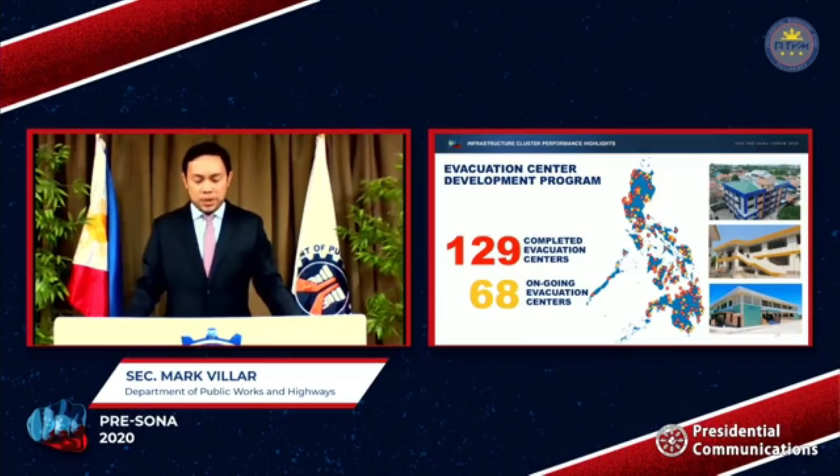Primarily built as a measure for disaster risk reduction, the Evacuation Center Development Program proved helpful during the Taal Volcano eruption in January 2020, and more recently for the COVID-19 outbreak. 63 evacuation centers were utilized as health quarantine facilities, capable of providing health monitoring and treatment to about 2,292 individuals. As of June 2020, a total of 1,686 persons were accommodated in these facilities.

The Center and Residential Care Facilities Infrastructure Project of the Department of Social Welfare and Development aims to give exemplary care and welfare services to marginalized and disadvantaged individuals, groups and families, including abandoned and neglected children, children in conflict with the law, street children, children with special needs, abused and trafficked girls and women, abandoned and unattached older persons, persons with disabilities, and deportees.

In 2018, 1.4 billion pesos was allotted for 210 projects in 71 dilapidated and congested facilities and 4 new centers. As of June 2020, 87% of 182 projects are already completed. An additional 114 million pesos was allotted in 2020 for 32 projects.

Maintaining peace and security, both from inside and outside forces, has been crucial for the country over the years. Through the Tatag ng Imprastraktura para sa Kapayapaan at Seguridad, or TIKAS, the construction of various infrastructure projects that will help the facility readiness of the military and police forces is given priority to ensure an environment of peace and security towards national development.

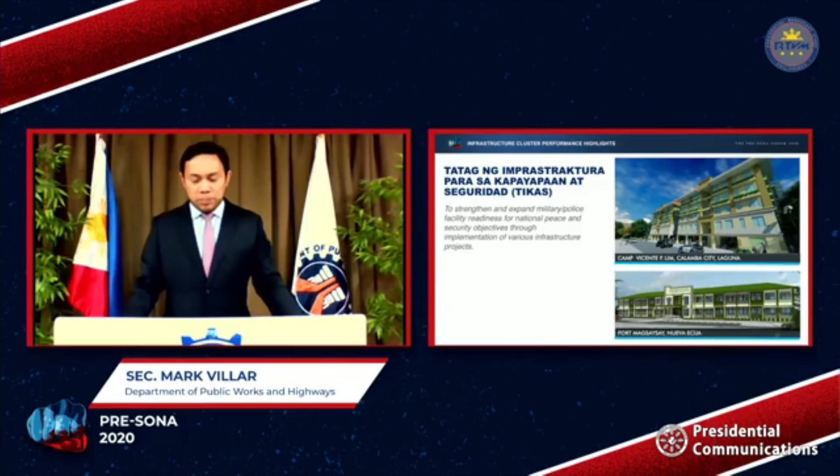From 2019 to 2020, a total of 7.1 billion pesos has been allocated for 297 TIKAS projects, one of which is the construction of a 5-story multi-purpose building in Camp Aguinaldo, which is near completion.

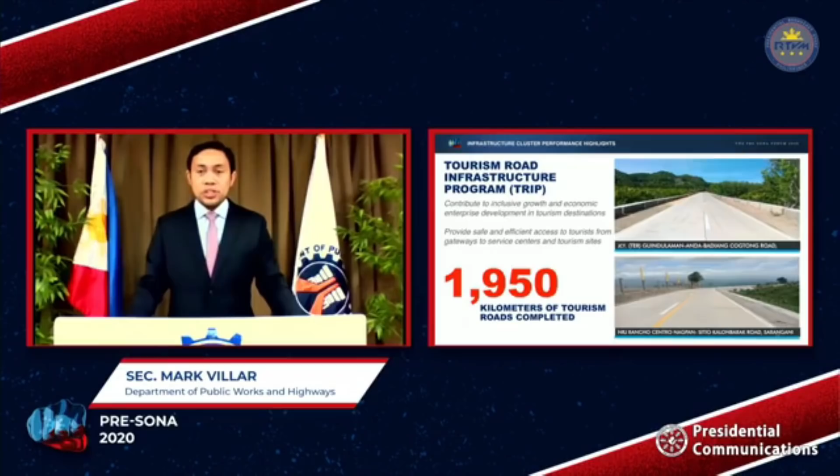The Tourism Road Infrastructure Program, or TRIP, is a highly successful and long-running convergence program of the Department of Tourism and the Department of Public Works and Highways that realizes tourism infrastructure development mandated by the Tourism Act of 2009. To date, a total of 104.5 billion pesos has been allocated for projects from 2016 to 2020, developing about 3,667 kilometers of access roads. These projects aim to enhance connectivity from gateways to service centers and tourism sites.

As of May 2020, 1,950 kilometers of tourism roads have been completed. The role of infrastructure is vital in sustaining tourism development.

In our Boracay Rehabilitation Program, for instance, the government is currently providing a safe and efficient road network throughout the island. Support infrastructure like pedestrian infrastructure, such as bike lanes, drainage, and enhancements such as lampposts and landscaping, are being rolled out towards a more rewarding experience for both locals and tourists.

The government remains committed to promoting inclusive growth and sustainable tourism by providing road access to community-based tourism sites. The ongoing improvement of the access road leading to Kaparkan Falls in Tineg, Abra will further boost the promotion of the falls as a new community-based tourism site in the Cordilleras. This effort will eventually spur economic activities, increase investments, and provide livelihood to the community.

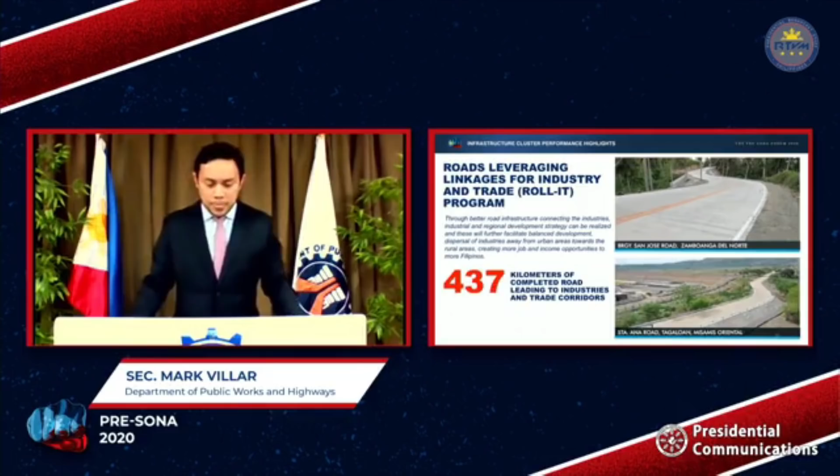The Department of Trade and Industry has also partnered with the DPWH to implement the Roll It program, which aims to enhance road connectivity and links industry and trade development in priority economic and manufacturing zones in the country. From 2018 to 2020, a total of 28.9 billion pesos has been appropriated for the construction and upgrading of about 1,009 kilometers of access roads leading to industries and trade corridors across the country.

As of May 2020, 437 kilometers have already been completed. Presently being improved is the access road leading to Nasipit Agusan del Norte Industrial Estate Special Economic Zone in Agusan del Norte. This road will connect Misamis Oriental to Agusan del Norte. The completion of the Barbero and Service Road in Tagoloan, Misamis Oriental has improved the connectivity of PHIVIDEC Industrial Estate to the port area, thus improving the logistic network of Northern Mindanao.

Amid the impending threat in conflict-affected areas, the government will bring about lasting and inclusive development to every Filipino from all sides of the country. The 19-kilometer Marawi Trans-Central Road project under the JICA grant has made remarkable progress since work resumed, towards achieving the early completion goal by December 2020.

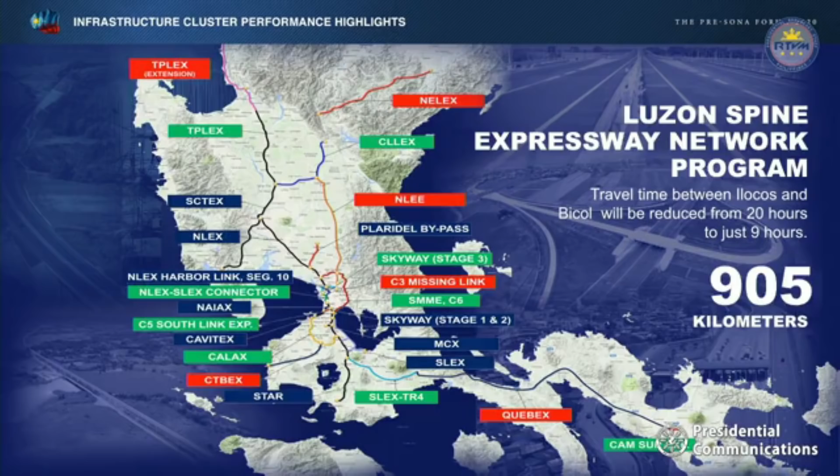This July 15, 2020, the 89-kilometer Tarlac-Pangasinan-La Union Expressway, or TPLEX, will now be fully utilized from Tarlac City to Rosario, La Union. Travel time between Tarlac City and Rosario, La Union will be reduced, and travel time from Manila to Rosario, La Union will be reduced to just 2.5 hours, benefiting 20,000 travelers per day.

Also, to further promote the development of Northern Luzon, a proposal has been submitted extending TPLEX by an additional 59 kilometers up to San Juan, La Union.

The east and west lateral connectivity is also being improved through the construction of the Central Luzon Link Expressway. The 30-kilometer expressway will reduce travel time between Tarlac City and Cabanatuan City from 70 minutes to 20 minutes, benefiting 11,200 motorists per day. The project is already 85% complete, and a significant portion of this expressway will be open before the end of the year.

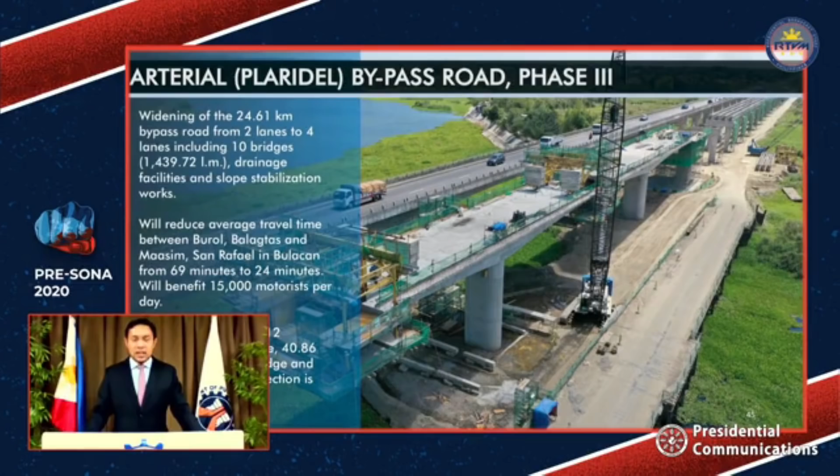The 24.61-kilometer arterial Plaridel Bypass Road, which was fully completed last May of 2018, is currently being widened to further ensure the safety and convenience of the motorists. The construction of the 1.12-kilometer Angat Bridge and the

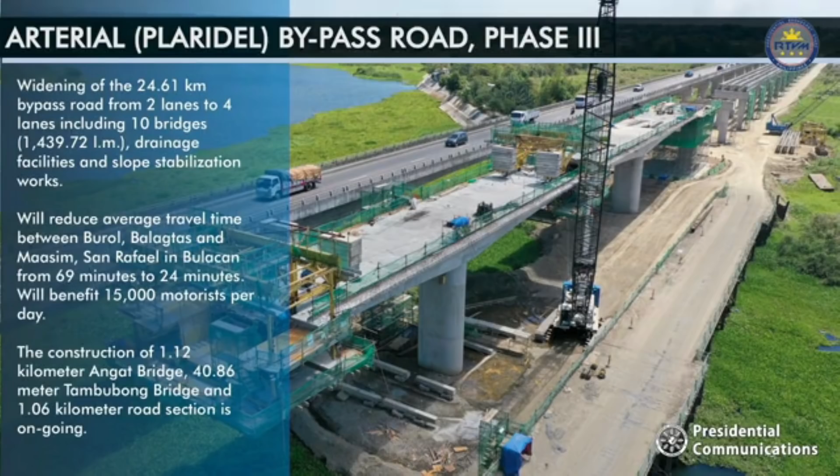40.86-meter Tambubong Bridge and 1.06-kilometer road is currently ongoing. The South Metro Manila Expressway, or C6, will reduce travel time from Bicutan to Batasan from 1 hour and 50 minutes to 26 minutes. Advanced construction activities for the workable area along Skyway FTI section is ongoing.

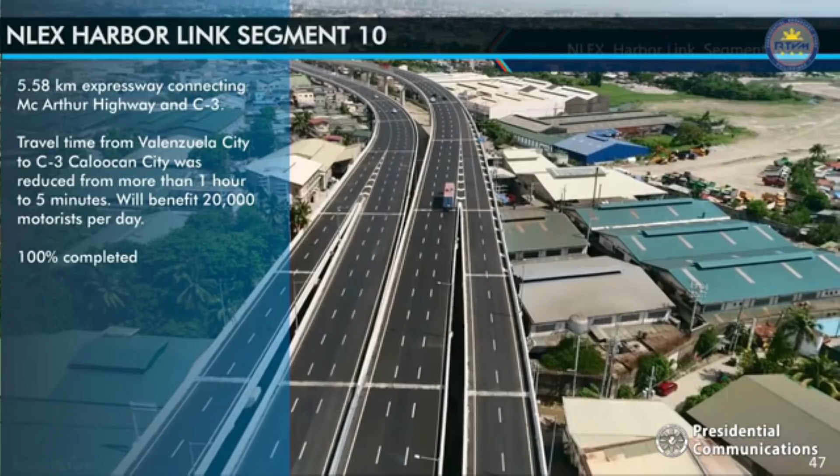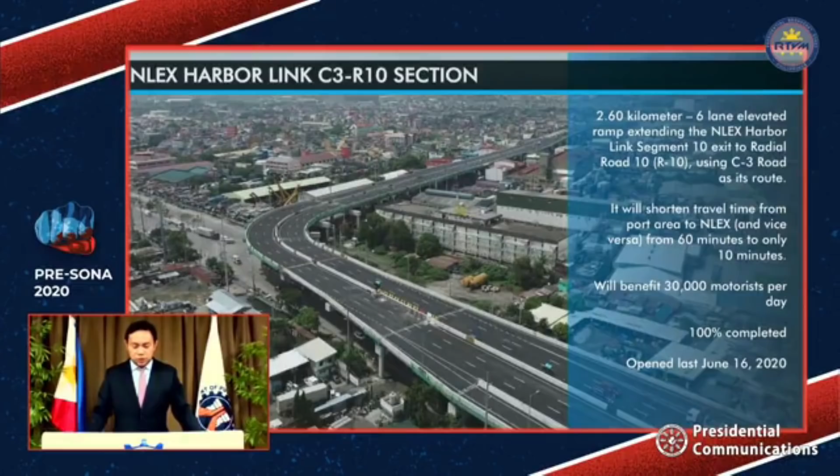The 5.58-kilometer NLEX Harbor Link Segment 10 Elevated Expressway connecting MacArthur Highway and C3 was opened last year, while the 2.6-kilometer C3 R10 section was opened last June 16, 2020. Travel time from NLEX Radial Road 10 to Navotas City to NLEX was reduced from 1 hour to just 10 minutes. This has also ensured the timely delivery of goods and services to and from the Port of Manila.

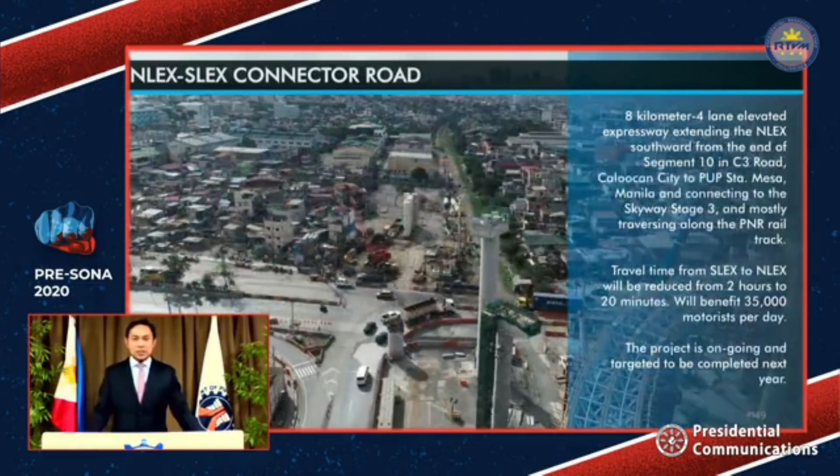The 8-kilometer NLEX SLEX Connector Road, which will connect the end of NLEX Harbor Link, passing PUP Santa Mesa up to the Skyway Stage 3. The project is ongoing and targeted to be completed late next year.

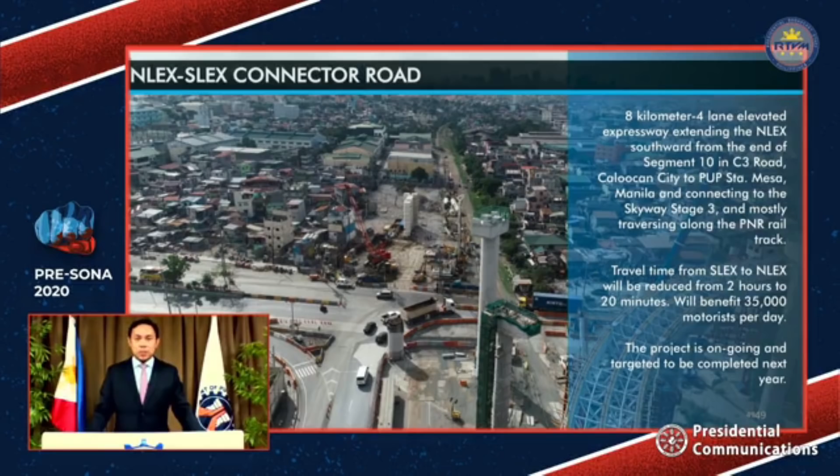The 18.83-kilometer Metro Manila Skyway Stage 3 aims to decongest traffic in Metro Manila, especially EDSA, C5, and other major roads in Metro Manila by as much as 55,000 cars daily.

Travel time from Buendia to Balintawak will be reduced from 2 hours to between 15 and 20 minutes. This project is currently 83% completed, and we are targeting it to be operational from Buendia to Balintawak at the end of this year.

The Alabang-Sucat Skyway Connection and Ramp Extension is being constructed to provide access from the elevated Skyway to South Luzon Expressway through the Alabang Viaduct. The project is targeted to be completed this year.

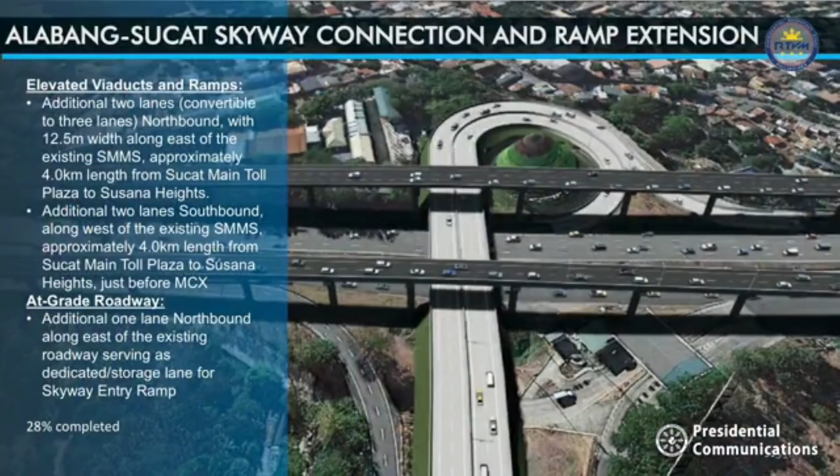The 7.7-kilometer Manila-Cavite Tollway C5 South Link Expressway aims to reduce travel time from R1 to C5 from 40 minutes to 10 minutes. The Merville to C5 SLEX section was opened last year.

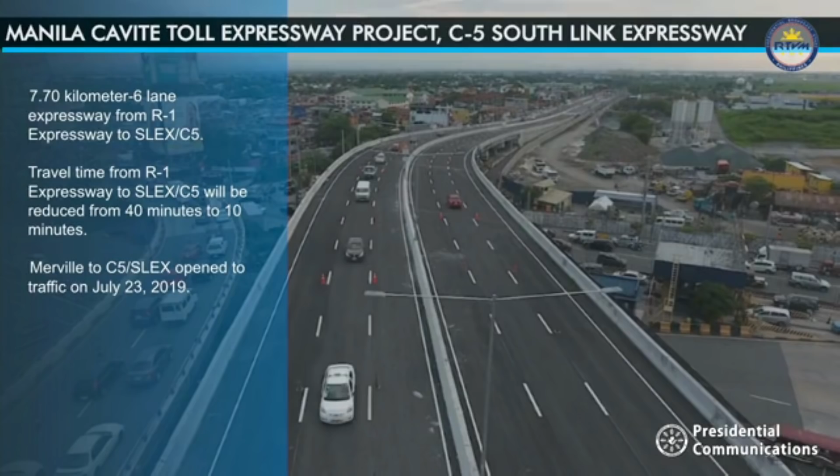The 45-kilometer Cavite-Laguna Expressway aims to reduce travel time between Cavitex and SLEX from 1 hour and 30 minutes to 45 minutes. The Laguna section is already operational, and the entire project will be completed within this administration.

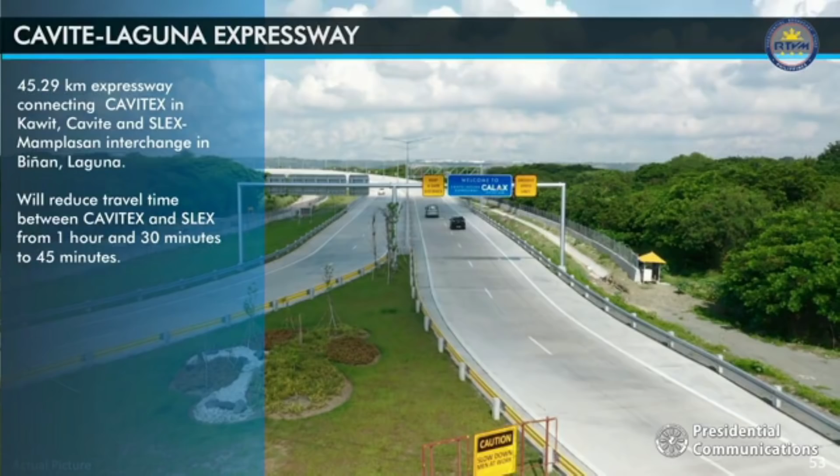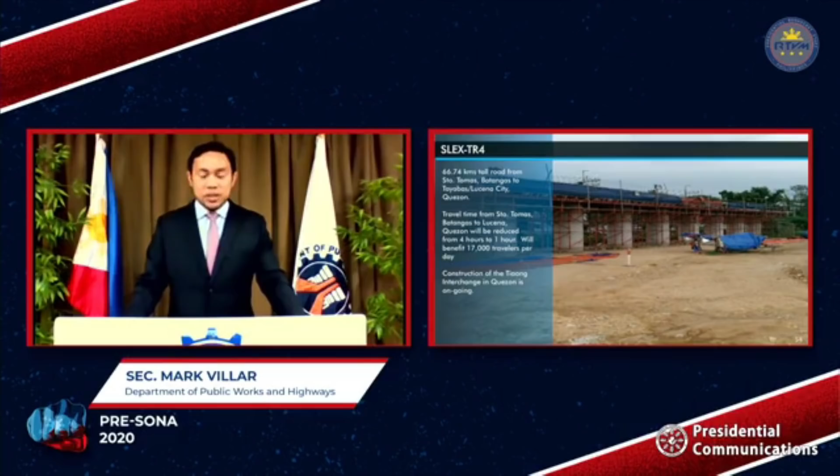The 66.74-kilometer South Luzon TR4 will facilitate faster and safer travel to Laguna, Batangas, Quezon, and Bicol region, and will reduce travel time from Santo Tomas, Batangas to Lucena City from 4 hours to 1 hour. Construction of the Tiaong Interchange in Quezon is currently ongoing.

The Quezon-Bicol Expressway feasibility study is now complete and the project is ready to be implemented. The 15-kilometer Camarines Sur Expressway connecting the municipalities of San Fernando and Pili in the province of Camarines Sur will reduce travel time from 51 minutes to 11 minutes and is already ongoing.

The government is also enhancing the connectivity of the expressways to the national and local roads through the construction of interchanges and access roads. The completion of the Ciudad de Victoria interchange overpass bridge alleviated the traffic situation of vehicles queuing at the Bocaue entry-exit toll gate.

The newly opened Tambubong interchange in Bocaue, Bulacan will offer another alternative for commuters at Bocaue interchange bound for Santa Maria, Norzagaray, Angat, and Pandi in eastern Bulacan.

An access diversion road that will connect the Star Tollway up to Batangas Lobo Road is also being constructed to further develop and expand the high-growth potential areas in Batangas. Travel time between Tinga, Itaas, and Pinamucan will be reduced from 1 hour 46 minutes to 30 to 50 minutes.

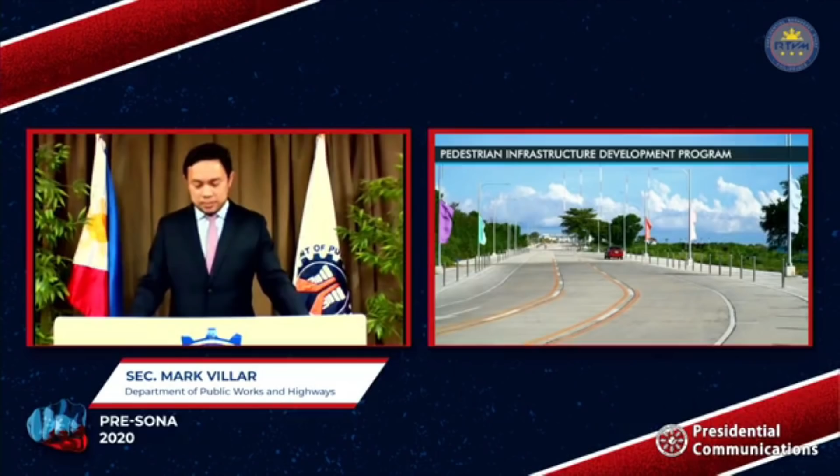Since 2016, the government has been prioritizing and implementing various programs that will develop and expand the pedestrian infrastructure nationwide. The bike facilities promote sustainability and the environment, and promote the environment and wellness of our people.

The Laguna Lake Highway was built with a 3-meter dedicated wide bicycle lane separated from the regular lanes by a 2-meter planting strip. The 46.6-kilometer Bacolod-Negros Occidental Economic Highway is also being built with separated or protected bicycle lanes.

The Leyte Tide Embankment project involves the construction of a 7,109 linear meter storm surge protection structure, including a 4-meter wide bicycle lane. Another project with provisions for bike lanes is the Davao City Coastal Road, which is an 18.2-kilometer bypass road currently under construction.

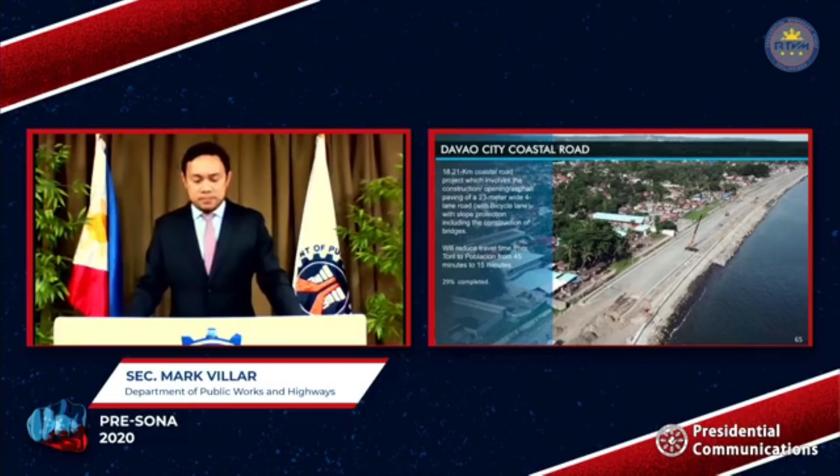As of May of 2020, 23,657 kilometers of roads were constructed, maintained, widened, upgraded, and rehabilitated.

Construction of new bridges to augment the 30 existing ones across the Pasig River, Marikina River, and Mangahan Floodway is expected to ease traffic along EDSA and other major roads in Metro Manila.

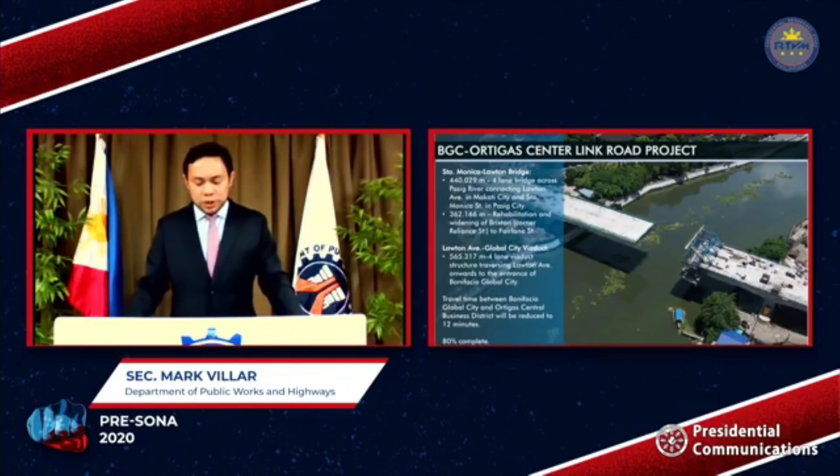Included in the project is the Bonifacio Global City Ortigas Center Link Road project, which includes the construction of a bridge to connect Lawton Avenue in Makati City and Santa Monica Street in Pasig City. Once completed, travel time between Bonifacio Global City and Ortigas Central Business District will be reduced to 12 minutes. The bridge is currently 80% complete.

Other bridges targeted to be completed next year are the Binondo Intramuros Bridge and the Estrella Pantaleon Bridge.

Bridging the travel gap.

Within the country's scattered island groups, the Inter-Island Linkage Mega Bridge Program will make Filipinos even closer and connected, as the construction of short and long-span bridges is seen to conquer geographical challenges.

Implementation of the Panguil Bay Bridge, which will be the longest bridge in the Philippines at 3.17 kilometers, is already ongoing. Once completed, it will only take 7 minutes to reach Tubod in Lanao del Norte from Tangub in Misamis Occidental using the bridge, compared to the 2.5 hours it would otherwise take via the 100-kilometer route.

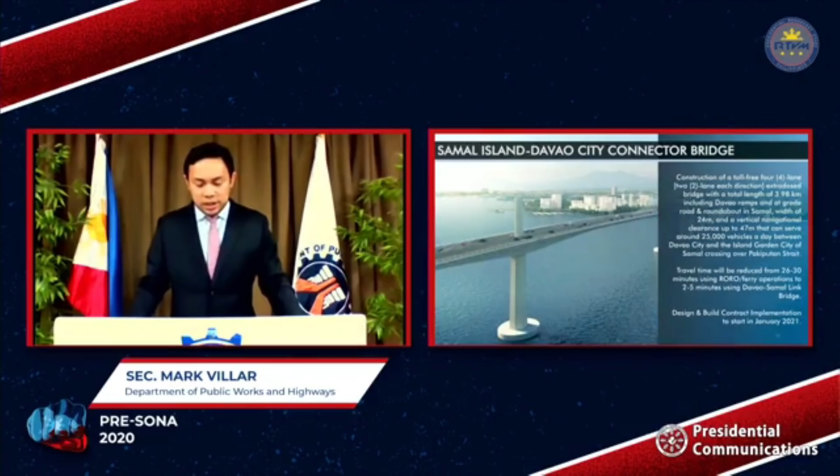The implementation for the NEDA board-approved Samal Island Davao City Connector Bridge is targeted to start in January of 2021. Once completed, travel time will be reduced from 26 to 30 minutes via Roro ferry operations to 2 to 5 minutes via the connector bridge.

Another project already approved by the NEDA board is the Bataan-Cavite Interlink Bridge, and the detailed engineering design for this 32-kilometer bridge is targeted to be completed in 2021.

Another bridge is the 32-kilometer series of bridges that will connect the islands of Panay, Guimaras, and Negros, which was already approved by the NEDA board last January 28, 2020.

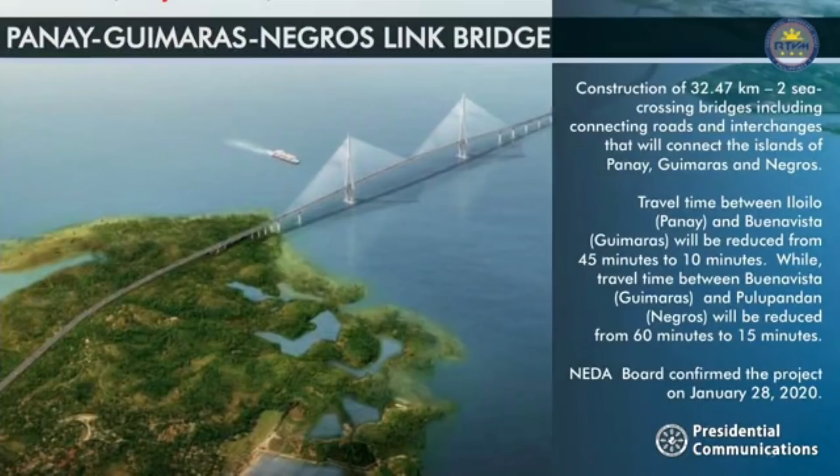The conduct of the detailed engineering design study of the Cebu-Mactan Bridge and Coastal Road Construction Project is funded by a JICA grant, and this detailed engineering will start in September of this year.

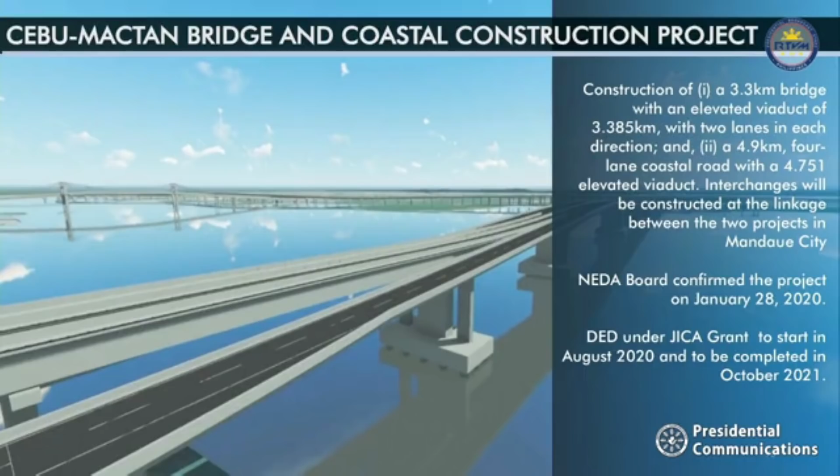The Panglao-Tagbilaran City Offshore Connector Bridge Project aims to reduce travel time from Tagbilaran Seaport to Panglao Island from 45 to 15 minutes. Construction of the approach roads and bridges are ongoing.

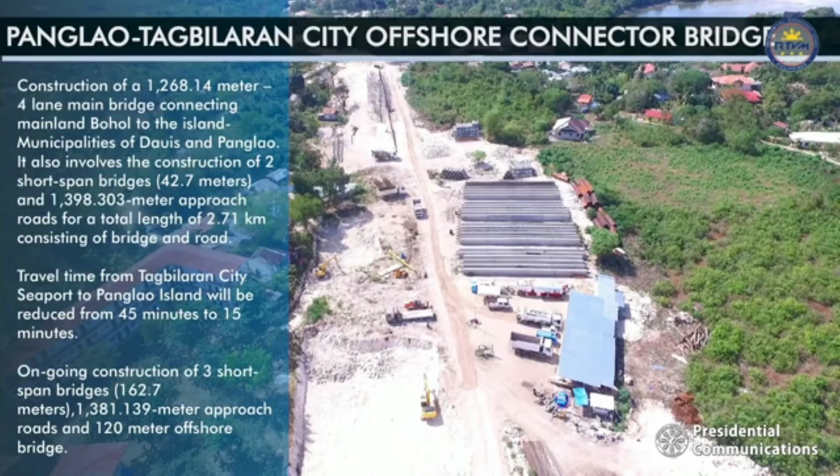As of May 2020, 4,959 bridges were constructed, widened, upgraded, rehabilitated, and strengthened.

Every year, the Philippines is visited by an average of 20 typhoons. Due to the geographical situation, our country has a long history of experiencing annual floods that have devastated our infrastructure and cost us human lives.

Therefore, a number of flood control measures were rolled out by the government to reduce flooding risks and effectively manage major flood events. As of May 2020, 8,941 flood mitigation projects, structures, and drainage system projects were completed.

Air connectivity remains one of the key factors to this country's progress. With President Rodrigo Roa Duterte's twofold directive to decongest our main gateway, the Ninoy Aquino International Airport, and promote regional development across the archipelago, the Department of Transportation has completed a total of 180 airport projects since 2016.

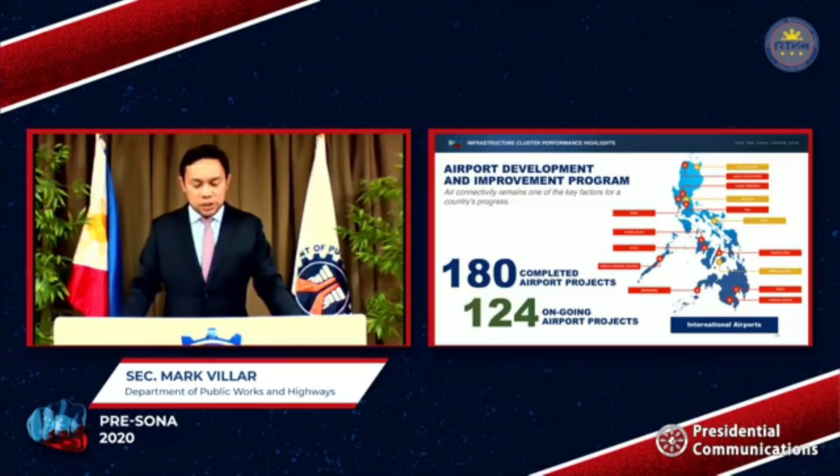Since the start of the Duterte administration, we have completed the construction of 2 new international airports. We have 1 international airport currently under construction and 1 more international airport set for construction.

Dubbed as the world's first resort airport, the Mactan Cebu International Airport's new world-class passenger terminal building was inaugurated on June 7, 2018, and is now catering to international flights. With the construction of the new terminal building, the airport's annual passenger capacity has increased from 4.5 to 12.5 million.

Currently, the construction of the Bicol International Airport is more than halfway complete. The airport is being built on a 148-hectare lot and will have a 2,500-meter runway with a scenic view of Mount Mayon. The Bulacan International Airport will help decongest passenger traffic at the NAIA.

The new airport is expected to be operational within 4 to 6 years from the target start of construction in 2020.

Also aimed to complement the operations of NAIA, a new passenger terminal building is being built at the Clark International Airport. As we work on decongesting NAIA, rehabilitation works continue for its Terminal 2. Formerly tagged as one of the worst airports, the NAIA is now recognized as among the most improved airports in the world.

Another gateway seen to help decongest NAIA, the Sangley Airport, was inaugurated on February 15, 2020. Construction of its additional facilities commenced in June 2019 and was completed ahead of its March 2020 target schedule. Sangley Airport caters to commercial cargo operations and is utilized for general aviation and turboprop cargo operations from 6 a.m. to 6 p.m.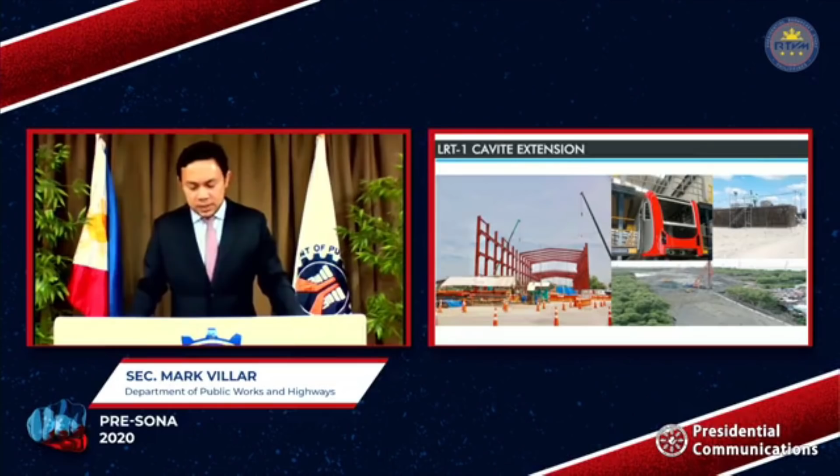After nearly 2 decades and 3 administrations, the construction of the LRT-1 Cavite extension project is now progressing with a 48% completion rate. The 11.7-kilometer extension line will cut travel between Baclaran and Bacoor from 1 hour and 10 minutes to just 25 minutes. Partial operations for the first 5 stations is eyed by the last quarter of 2021.

The LRT-2 continues to see progress as the overall construction of the project is now 90% complete. The viaducts are already complete, while the design and build of the 2 new stations, namely the Emerald Station in Marikina and the Masinag Station in Antipolo, are 96% complete. Once completed, travel time from Recto, Manila to Masinag, Antipolo will be reduced from 3 hours via bus or jeepney to just 40 minutes.

Stalled since 2009, the Common Station finally moves forward under the Duterte administration with an overall accomplishment rate of 44%. The Common Station is a concourse area that will connect 4 major railway systems, namely the LRT-1, MRT-3, MRT-7, and the Metro Manila Subway. The entire Common Station is expected to be operational by 2022.

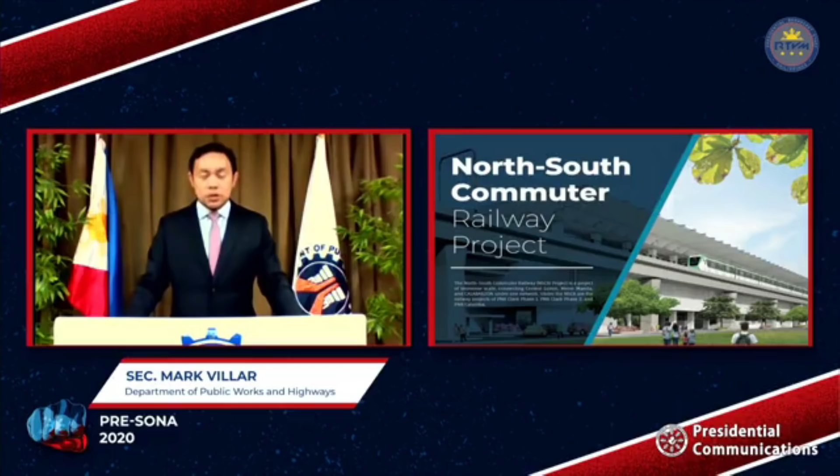The North-South Commuter Railway Project is a 147-kilometer mass transportation railway system that will traverse through Clark, Pampanga, Metro Manila, all the way to Calamba, Laguna. It offers a seamless connection of 3 railway lines: the PNR Clark Phase 1, PNR Clark Phase 2, and the PNR Calamba. The PNR Clark Phase 1 has already started construction works in Solis and portions of Bocaue and Malolos.

The project involves the construction of a 37.6-kilometer commuter railway from Malolos to Tutuban. Once completed, the commuter railway will benefit over 300,000 passengers daily.

The PNR Clark Phase 2 is a 53-kilometer extension from Malolos, Bulacan to Clark, Pampanga. This will feature the country's first airport express railway service. The segment is seen to accommodate 340,000 passengers daily. Partial operation of the PNR Clark Phase 2 is set in 2022.

The PNR Calamba is a 56-kilometer railway line from Solis, Manila to Laguna. The right-of-way and site acquisition, detailed engineering design, and procurement for general consulting are ongoing.

PNR continues to improve its services, further extending its routes from Malabon City to IRRI in Laguna, and now with a total of 29 operational stations. With the addition of new diesel multiple units and passenger coaches from Indonesia and Japan, PNR will be able to extend and serve more passengers at an economically viable cost. PNR continues its refleeting strategy, aimed at increasing capacity and frequency of trips.

The 639-kilometer PNR Bicol Railway project will connect Metro Manila, Region 4A, and Region 5, reducing travel time between Manila and Legazpi City from 13 hours to just 6 hours. Right-of-way and site acquisition and processing of the loan agreement for the project management consultancy are ongoing. Partial operability is targeted by 2022.

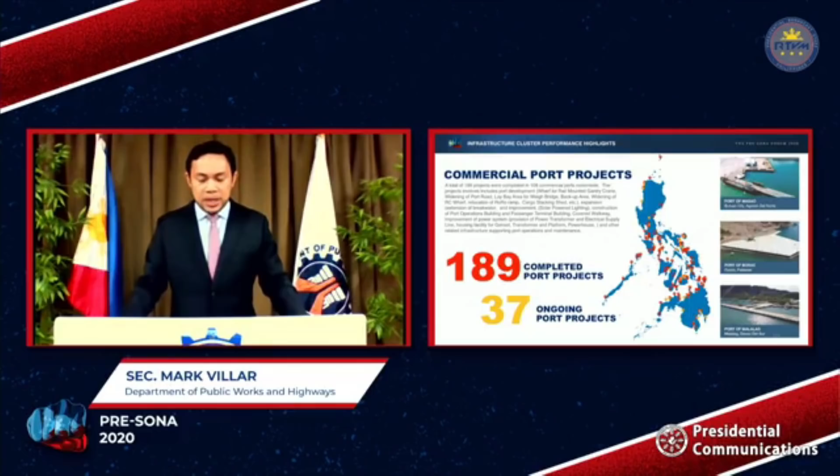189 commercial port projects, with 37 more ongoing. These port projects involve port development and expansion, construction of port operations buildings and passenger terminal buildings, installation of solar-powered lighting, improvement of power systems, and other related infrastructure supporting port operations and maintenance.

To increase the country's connectivity and mobility, as well as establish new local growth areas for tourism, trade, and logistics, 164 social and tourism port projects have already been completed, while 76 are ongoing.

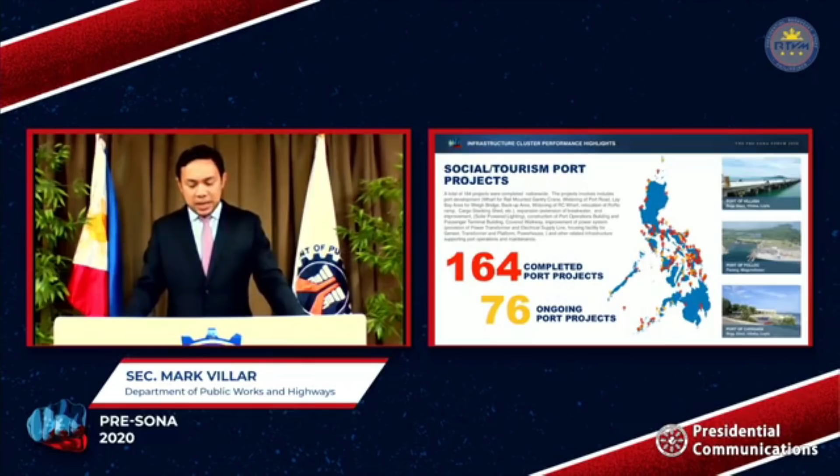Inaugurated last year, the Parañaque Integrated Terminal Exchange, PITX, is the country's first land port. This new terminal serves as a transfer point for commuters from Cavite and Batangas going to general parts of Metro Manila.

Aside from the PITX, 2 more intermodal terminals will be built: the Taguig Integrated Terminal Exchange and the North Integrated Terminal Exchange. There are also plans for future infrastructure projects such as the Metro Manila Bus Rapid Transit Line 1 in Quezon Avenue, EDSA, the Makati BGC Greenway, the Cebu Intermodal Integrated Transport System, and the Davao High Priority Bus System.

In 2019, in New Clark City, with only 18 months, the BCDA was able to complete Phase 1A of the National Government Administration Center. This unveiled the modern structures that we've seen during the 2019 Southeast Asian Games, a government building for backup offices of various agencies to ensure continuous service for the people in case of a disaster.

A state-of-the-art sports complex with the aquatic center, athletic stadium and athletes village, the UP-PGH Polyclinic, the residences, and the 1.4-kilometer river park. Before hosting the Southeast Asian Games, the athletic stadium and aquatic center were certified world-class by the International Association of Athletics Federations and the Federation Internationale de Natation.

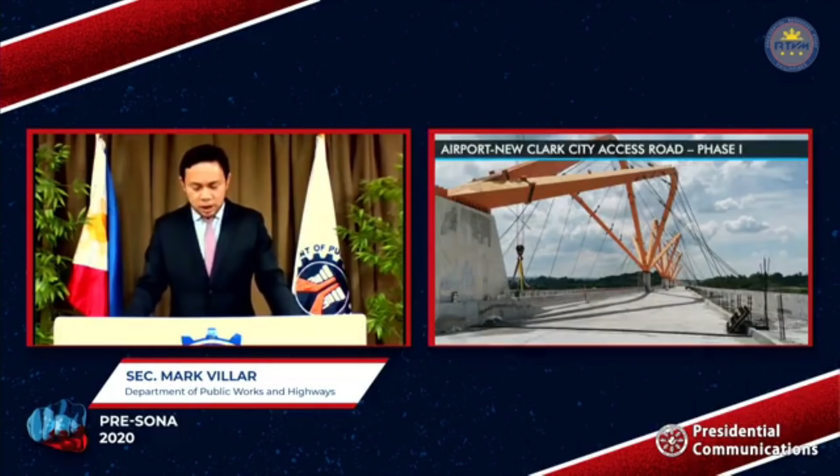Also being constructed is the 19.8-kilometer, 6-lane access road that will connect New Clark City to the Clark International Airport. Phase 1, with a length of 5.33 kilometers, is already 88% complete and is targeted to be completed in August 2020. Upon full development of all 3 phases by 2021, the road will create a direct link from Clark Main Zone, Clark International Airport, to New Clark City and vice versa.

Further, a 4.54-kilometer spur road to New Clark City will also be finished by this October. It is currently 70% complete.

To strengthen the potential of New Clark City as an investment destination and an international trading hub for sports, BCDA has lined up among the priority projects the tender for the operations and maintenance of the sports complex and the selection of a joint venture partner for the development of the National Government Administrative Center Phase 2.

New Clark City, which played a key role during the 30th Southeast Asian Games, is now helping the country as a quarantine facility. The government building and athletes village are currently among the We Heal as One centers, showing its resiliency as a metropolis and its reliability for multi-usage. It has been scaled up to contain the community spread of COVID-19.

As early as February 2020, the Interagency Task Force on Emerging Infectious Diseases had already identified the athletes' village as a quarantine site, following the urgent need to find shelter for Filipinos coming home from foreign countries.

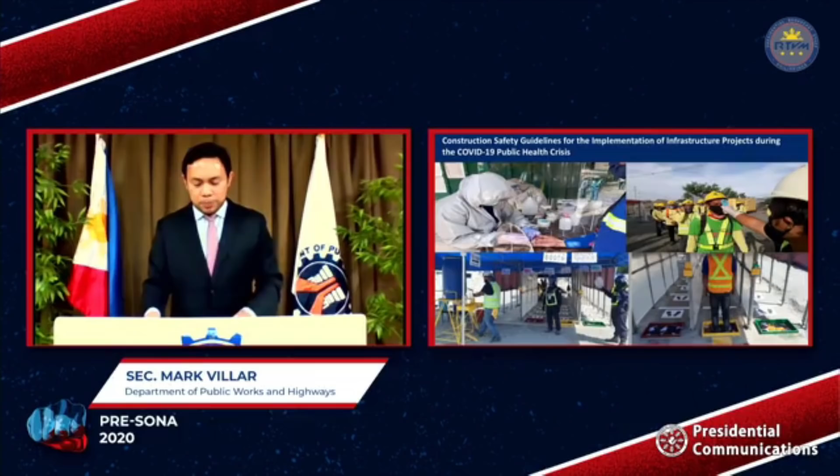In view of the current situation involving COVID-19, implementation of infrastructure projects is subject to compliance with construction safety guidelines. In addition to the regular occupational safety and health guidelines of the Department of Labor in the construction industry, the following are among the special requirements and regulations for protection and prevention against COVID: daily monitoring of our health workers, health checklists, exposure checklists, issuance of quarantine passes, physical distancing, discouraging the sharing of hand tools and power tools, regular disinfection at work areas, and no deployment of workers with pre-existing health conditions, including persons above 60 years old, so as not to compromise their immune systems.

Yet it is comforting to know that in these trying times, many Filipinos from all walks of life have chosen to step up in the spirit of bayanihan. We have witnessed bursts of charity and resourcefulness from various groups and partners all around us. And because of this, hope will continue to emerge among us in the midst of uncertainties for what may still be a very long battle ahead.

The national government, in partnership with the private sector and local government units, was able to execute the conversion of 11 public and private structures in Metro Manila, Central Luzon, Laguna, and Davao City into mega community quarantine centers, or We Heal as One centers, with a total bed capacity of 2,584. 30 units of container vans were also repurposed into mobile rooms which can be used as additional COVID-19 isolation health facilities. We will be doing our best to make sure that those who are sick have access to healthcare facilities.